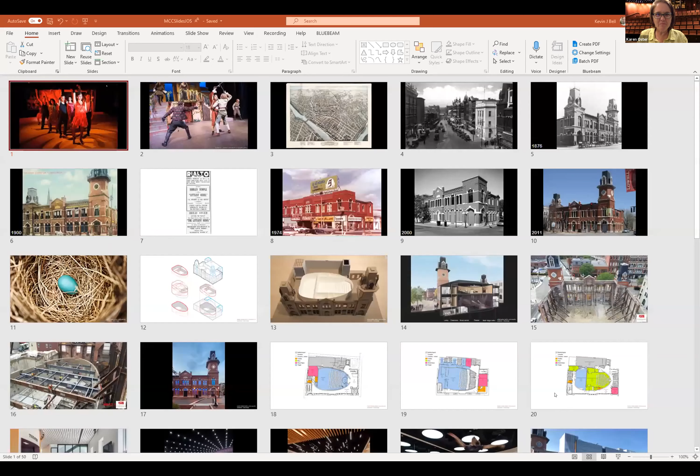Great. I think I'm beginning here. So my name's Karen Oster. That's not me. I am the chair of performing arts at Middlesex Community College. And just wanted to give you a little bit of background about Middlesex. We have 2 campuses, one in Bedford and one in Lowell. Our Lowell campus we acquired in 1987, so it's been there for quite a while. It's one of the largest community colleges in Massachusetts. We have about 80+ degree programs and serve about 12,000 students.

Middlesex is also a leader in global education and has had a huge impact on the area in terms of economy and has contributed significantly to the community. MCC also has a history of securing historic buildings with the John Nesmith House, the Federal Building, and the Middlesex Meeting House in Bedford. So this is not something that we haven't done before, but this certainly is, I think, the best out of all of them.

So what you're seeing here is our old theater. And it's interesting because you can see from this lovely actress Joan in the front that the top of her hand, it's not an optical illusion, but the top of her hand is actually very close to the ceiling.

One of the things in first sort of talking about the performing arts program is that we never really had our own space. The performing arts program at Middlesex has a theater department with two degrees and a music department with two degrees, but the music department always had a recital hall in Bedford. So the theater was always kind of this nomad looking for a space.

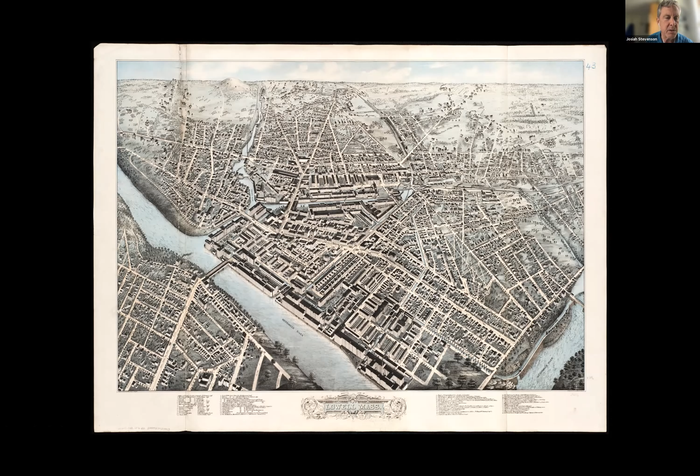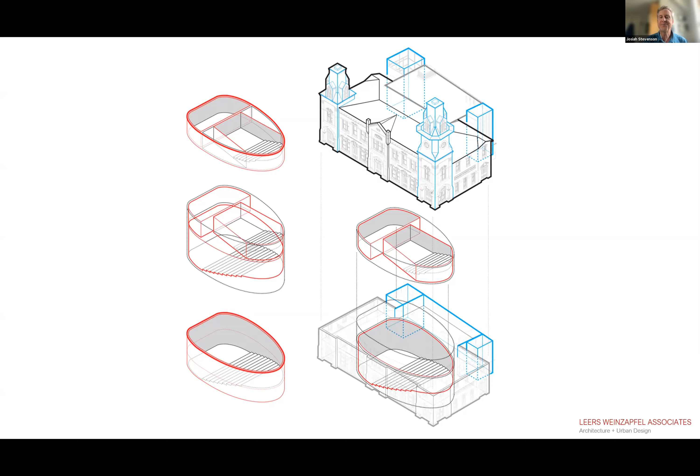And then also you see the original structure, and there's a back piece. So in the end, there were four towers. There was the entry tower, there was the stair tower. In the back, this new element was a cooling tower and an elevator tower. So there you see the idea in model form. Next slide, please.

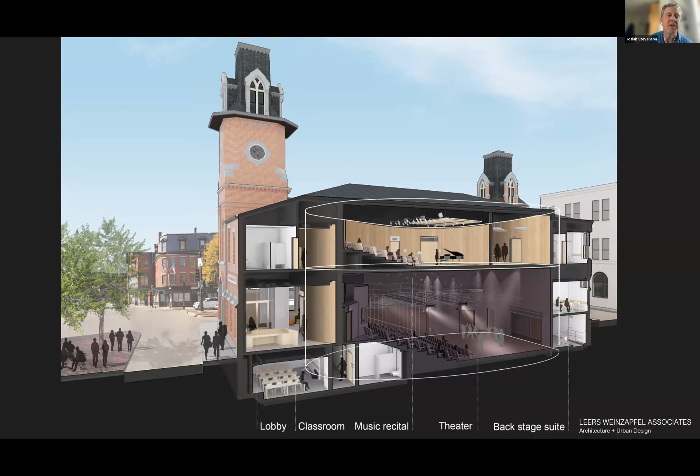And then this, I'm not going to spend time on the actual drawings, but you can see the entry area on the left on the first floor, and then you can get into the back of the theater, and it's all fully accessible, and you can take the elevator down and get into the front of the theater in the basement, and that's fully accessible as well. Next.

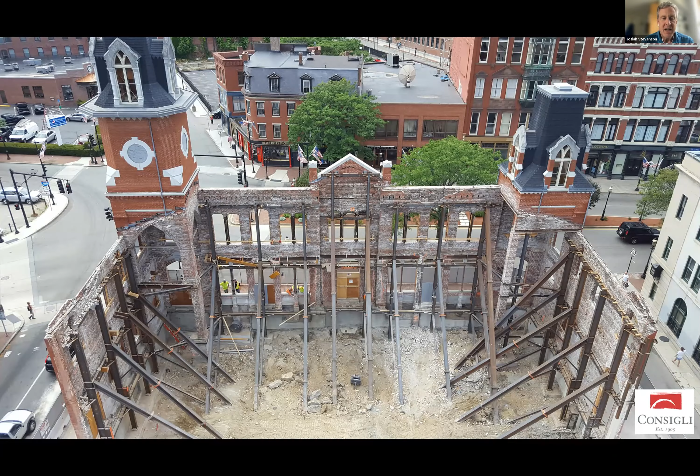Next slide, please. So this egg became this massive structure. It was the horizontal resistance. It took all the loads basically. And it's basically a 10-inch concrete block, fully grouted structure that held on to the existing outside structure.

And on the subject of renovations and embodied carbon, which is an important issue here, obviously building reuse is the best thing to do for that. And then next on the list would be wood or mass timber. And then it gets worse and worse, steel, and then concrete. So here what we're doing is adding massive amounts of concrete to this building.

And it reminded me of a guy I used to work with. He used to come in the morning with a healthy drink and a Danish filled with sugar. And I said, you can't put those two together because one is bad for you, the other one is good. And he said, well, bad and good means even. I'm even. So at first I thought, if we're adding all this concrete, it's pretty even.

But the truth is, if you're building a theater, you're building something that resists sound transmission from the outside, and this is in the city. So I think it's still in the net positive range. Next.

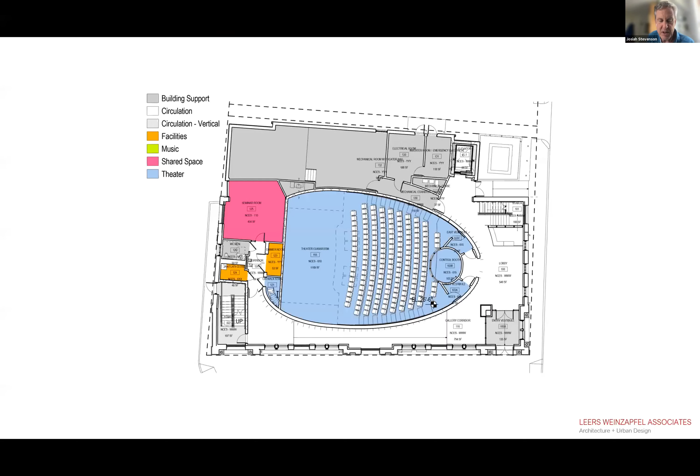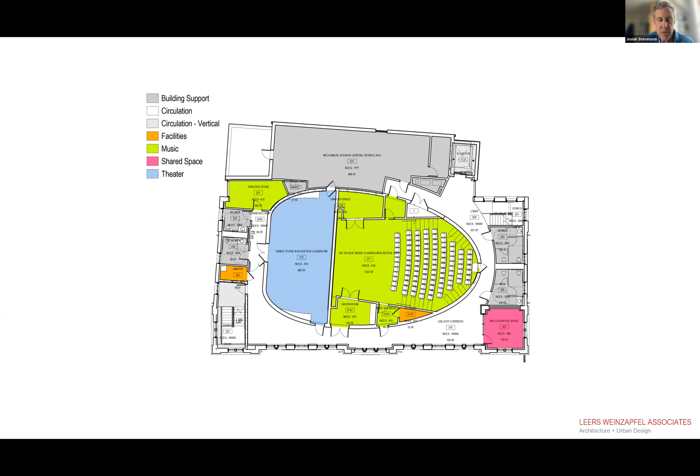And then I'm not going to go through the plans because we don't have much time. It's not really worth discussing, but there's the first floor. You come into the theater from the back and descend. Next. And this is the basement where you can get around to the accessibility on the lower level. It's a very steep rake, dropping one floor. Next. And this is the performance space and the dance studio in blue.

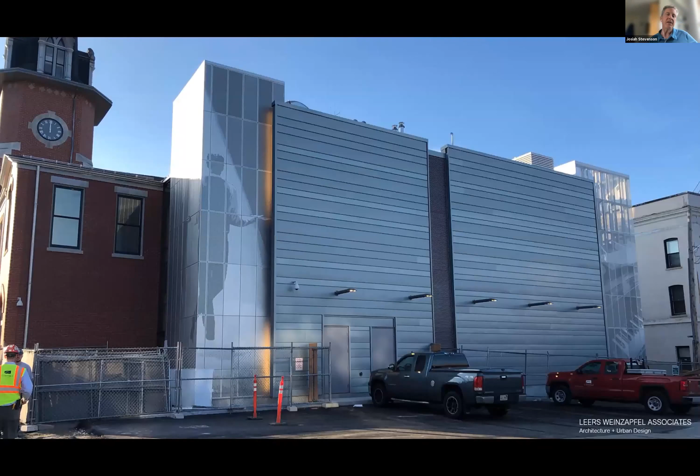And then finally, on the rear of the building, we added a couple of feet of mechanical spaces. And in Lowell, if you look around, some of these historic buildings have these little appendages in the back, and they're often aluminum or steel, like elevators and things like that. So this is in that spirit. And at the elevator tower is a Chicago image that's taken from Richard Gere's, not Richard Gere. And on the other side is the musical part, which is the piano. And Kevin will talk in much more detail about this now.

Thanks, Josiah. Just going to touch on two things. Josiah alluded to that shoring challenge with the existing historic envelope, and then a little bit on sustainability. So it's a little bit about how you get from design to here. This is an image of the building when it opened.

Gosh, the pandemic has my time off. So it was like 2 years ago, 2.5 years ago. I can't remember anymore. Something, pandemic plus a year maybe.

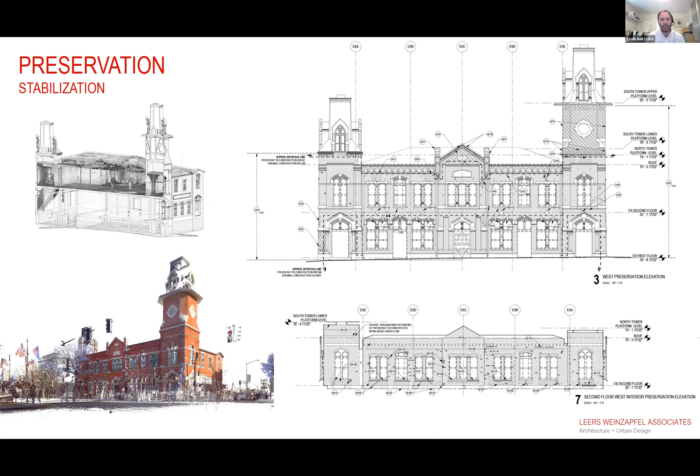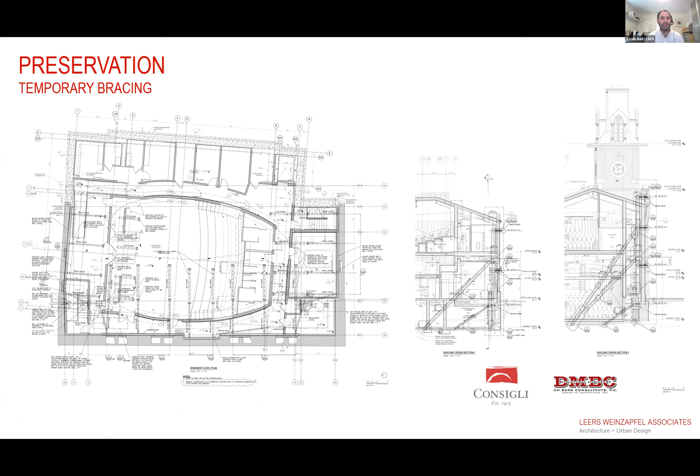From there, Consigli was our CM, and they worked with DM Berg to develop that temporary bracing system. And I think what's most important about this is what it means to brace the exterior during construction and what that affects. Obviously this temp bracing is coordinated with the existing structure. It needs to be coordinated with the new permanent structure. It needs to be coordinated with all the underslab utilities, any major duct and pipe routing,

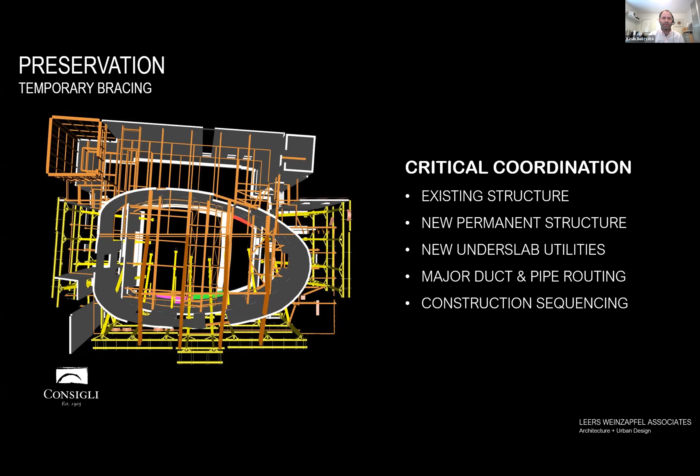as well as simply the construction sequencing, because the temp shoring, you're seeing these really long kickers running from basically bedrock up to the roof of the building, but all of those have to go in when the existing structure is there and come out when the new structure is there. So it's thinking about just about every system in the building, and this temp bracing system has to avoid it and be able to go in and out without being the worst challenge in the world, which it was substantial.

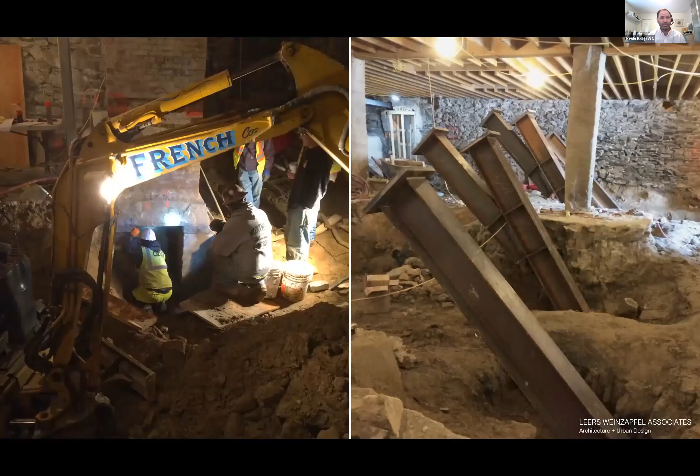So just a few images to walk through. The image Josiah showed is pretty incredible, and this kind of tells the story of how we get to that. The image on the left here is actually one of the underpinning subs. He's actually tucking his head under a corner of the 500,000 pound tower. I think that's the final section of underpinning that had to go in. So we had to underpin portions of the building before we could begin to brace it, and had to actually reconstruct huge portions of the interior of the building so it was structurally sound to brace. And then they came in.

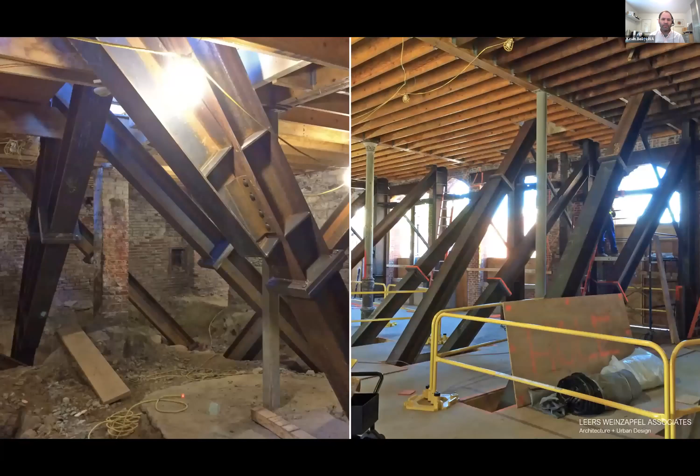The temp shoring in our case was close to bedrock, so that's good. So these kickers are actually anchored to the bedrock with 12-foot long rock anchors to keep them in place throughout construction. And then you can see in these images those pieces of those kickers getting assembled in the existing building, slowly making their way up to the roof, which then allows demo and recycling of that existing structure.

And really there were two big reasons why the existing structure just wasn't adequate. One, it was wood, and it wouldn't support assembly loading. We have assembly loading at all 3 floors here. And the second piece is the roof had pretty much failed, and so that was going to need to be replaced. So a huge part of this building needed to come down anyways.

And so we actually did a study during design to see what we could save, and came to the realization that we couldn't save much on the interior. And it was best programmatically, and for the facade, the important element that everyone was really committed to and attached to preserving, to do this new structure on the inside. And on the right here, you see that kind of mangrove roots coming off the existing building down to bedrock.

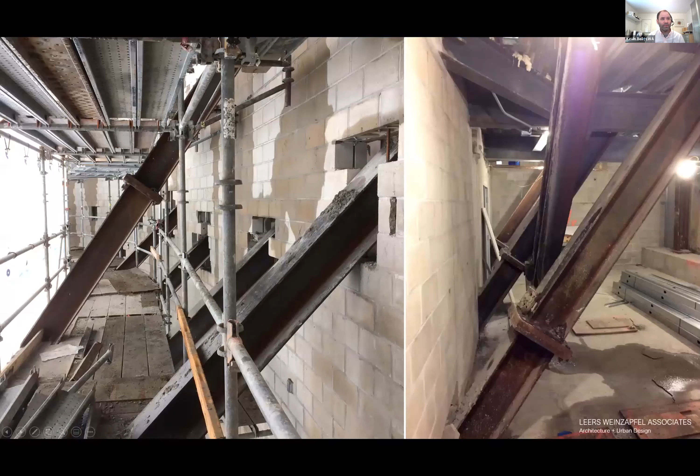And then just a few images of building up around that temp shoring, including a zero lot line, single-sided concrete wall on the one side that is new, and a lot of concrete going in to deal with that. On the left here, we're in the theater. This is all the temp shoring coming through.

To be quite frank, we could not have done this wall out of cast-in-place concrete. It could really only be done out of CMU, just because I think we had 46 holes in that wall for the temp steel, and another 60 or so for permanent steel.

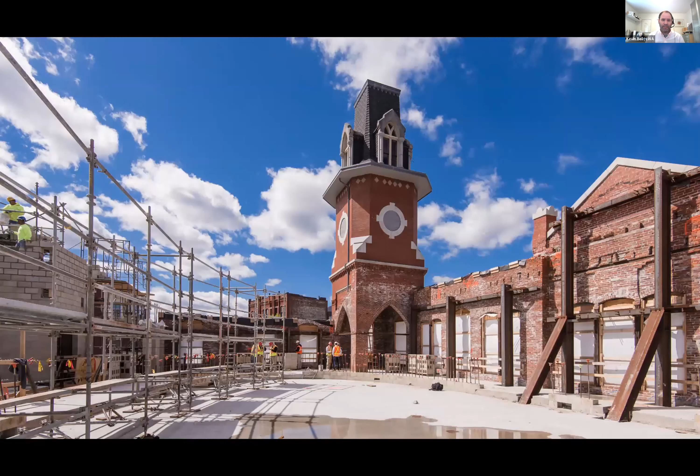So to have a mason, a craftsman on site that could actually work with the engineer, work with the CM, and work with the design team to figure out how to build this wall around, not just at the theater, but elsewhere around all this temp shoring, was an amazing task. And the folks that did it were really fabulous, bringing that up to a second floor level and ultimately to the roof.

And this is another point, to Josiah's point: in order to get this steel out, it had to be cut into small pieces and taken out by hand once the permanent structure was in place. So steel is highly recyclable. That's the piece we kind of hang our hat on when it comes to this, but there was actually more temporary steel in this building than permanent steel.

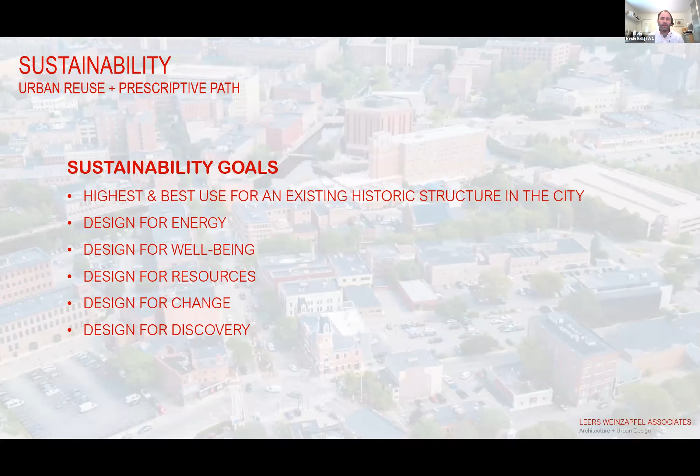And so that brings us to sustainability around this. We're doing a lot to an existing building. And the first point to make is what both Karen and Josiah alluded to: what's the highest and best use for a historic building in this context? A point that was important to us, and I think conveyed to everyone, is that this building really had a lot of lives, and we know, the college being a good steward of buildings, that quite frankly, this building will be a theater for the college for longer than any other life it's had.

So having a user that can adopt a building and make it their home and take care of it means that we're going to have a building that's used and lasts for a very long time into the future. The other piece being, they're in the city. The college has made a commitment to open this urban campus, to acquire buildings and restore them, and to be a really active and vital piece of the city. And this building helps them expand that.

So in that sense, there really wasn't anyone else who could save this building. It was really the college, and proof of that is that it took 30 years to get it saved. So I think that's an important piece of sustainability when it comes to historic construction: really making sure that you have that highest and best use for it, so that it really does last into the future.

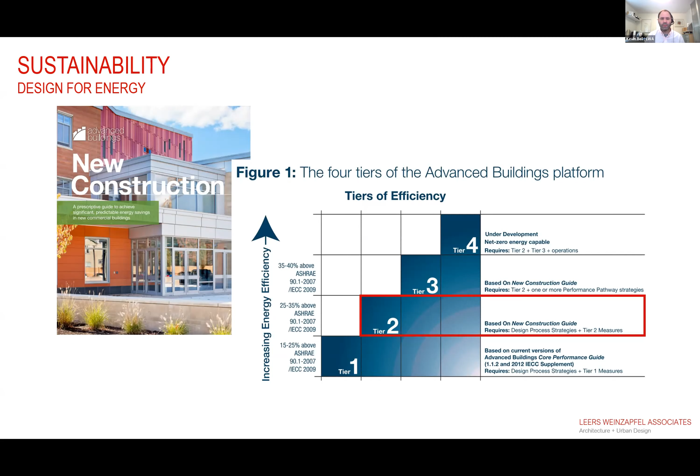So we treated the building to the extent we could as a new building, and really limited where we couldn't meet these measures at the tier 2 level just to the existing building, where really durability was the major component. So broadly speaking, we brought the envelope efficiency way up, and quite frankly, even the existing historic masonry walls, we were able to get them very near to at least code compliant insulation levels, while still keeping them breathable and allowing that moisture to both move into the space and out to the exterior, so that basically that exterior wall that's been able to breathe for 140 years could continue to breathe.

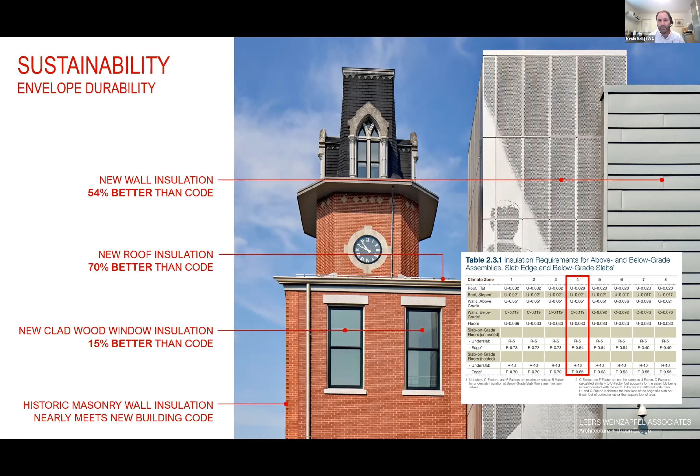We're on an urban campus in a city, and there's no central plant, so we don't get the benefits that a lot of academic buildings, particularly on campuses in the Northeast, have, which is campus utilities like chilled water and hot water. So our building, and the reason we needed so much mechanical space here, is because we have a plant in the building. We have a chiller, we have boilers.

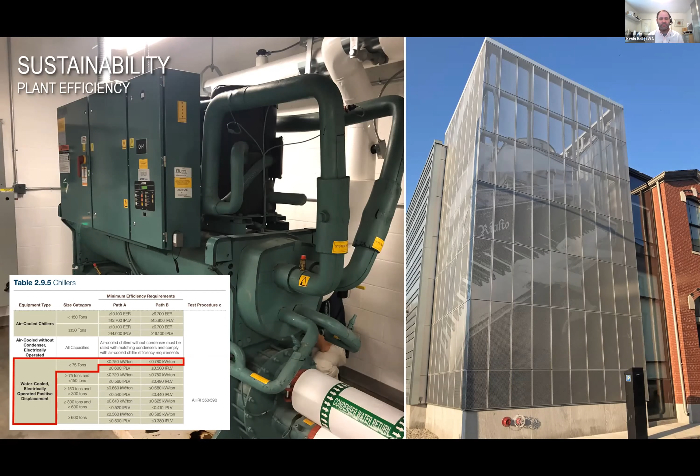And so the prescriptive system that the new construction guide applies really gives you kind of guide rails to work within and meet measures. And it can be really beneficial overall, because there aren't necessarily gray areas. If you meet these prescriptive measures, you have a good chance of being energy efficient. So it's great when there's so much more to deal with in an existing historic building that might take precedence and priority over other things.

Important to us, and actually a really great benefit of the existing building, part of the reason why it requires so much bracing, is the number of windows in it. It's a really porous facade as far as windows go, and so we tried to organize the public spaces and the spaces that could be daylit around the exterior, and quite frankly, we have some spaces that are restrooms that are actually beautifully daylit, even with translucent glass, because we wanted to bring light in as much as possible and maintain that transparency to the outside that the original building had.

And by that same method, thinking about well-being, making sure that these theater spaces, theater, recital hall, dance space, could operate at the same time as teaching spaces. We're so packed in that the recital hall sits over the theater. And so there's this fairly complex floor system between the two that isolates it, so Karen and Carmen and others can teach in the space.

And then that egg form, if you will, that CMU really helps isolate the interior from the exterior. So even though we're in a busy city and there's frequent traffic going by on three sides, once you move into the theater through the vestibules and into the recital hall, it's really quiet and calm.

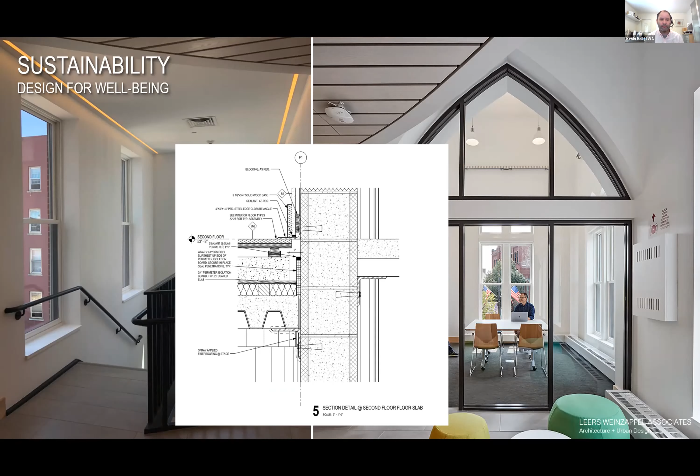We didn't pursue LEED on this project because we used that alternative method, but we did want to make sure that those criteria that we attribute to LEED frequently, we still incorporated those. So although we weren't seeking LEED certification here, we did require certified wood and low emitting materials, and obviously construction demolition waste tracking and diversion, as well as maintaining all the construction indoor air quality requirements so that it's a safe, healthy place to be in the end.

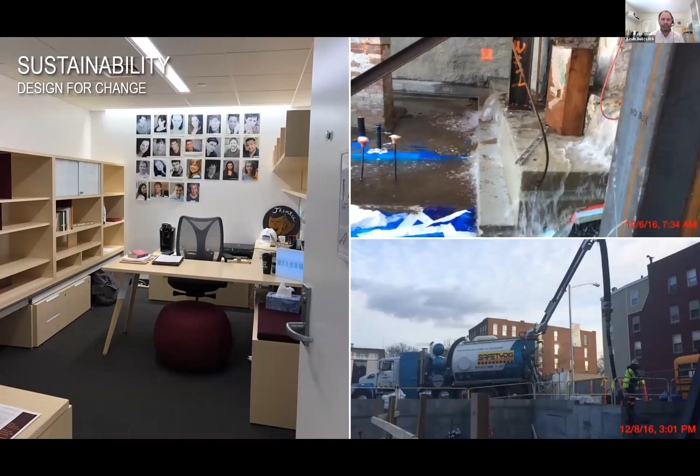And that continues. This is actually Karen's office. Sorry, Karen, I'm showing it.

Resilience in this context is both resilience against, on the right here, you're seeing we had a water main break during construction, and the pipe in Lowell is so old that oftentimes it's been leaking for a long time and carving out basically underground caverns that connect the buildings. So this was a water main leak that brought 3 feet of water into the building during construction.

So part of our design and part of making this building as viable as possible was to get program into the basement, and that meant a waterproofing program, under slab drainage that worked with, in fact, an under slab depressurization system. We're right on granite here, and knowing that for Karen and her students, the kids in this building, it is a second home for them, we wanted to make sure that we were eliminating any potential for someone who's in this building for a long time to have any exposure to radon.

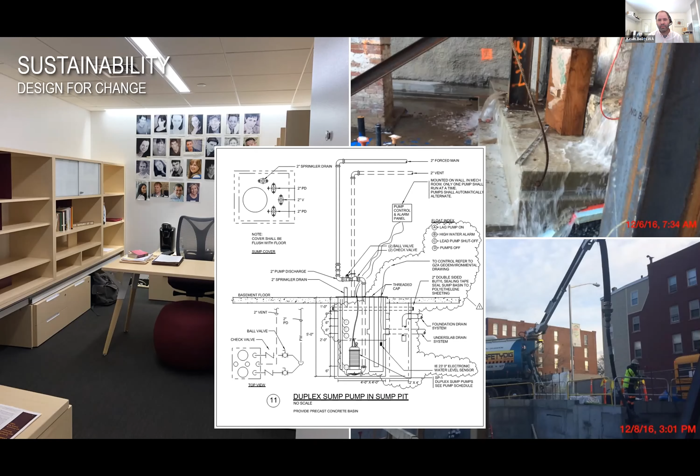So we have an entire depressurization system under the building as well. And there's other measures too to make sure we don't get backwater from the sewer system, which is combined, and that the whole space stays dry and safe for teaching.

And then finally, on designing for change, although Karen and her team use these spaces quite frequently, it was important to the college that they be able to use it as lecture space, as meeting space, as seminar space. And so even in our recital hall, which was meant to be very quiet and devoid of technology, we tucked some things away so that those spaces could be used by the rest of the college, so that it was always flexible enough to accommodate different uses, even though these are highly technical and specific spaces.

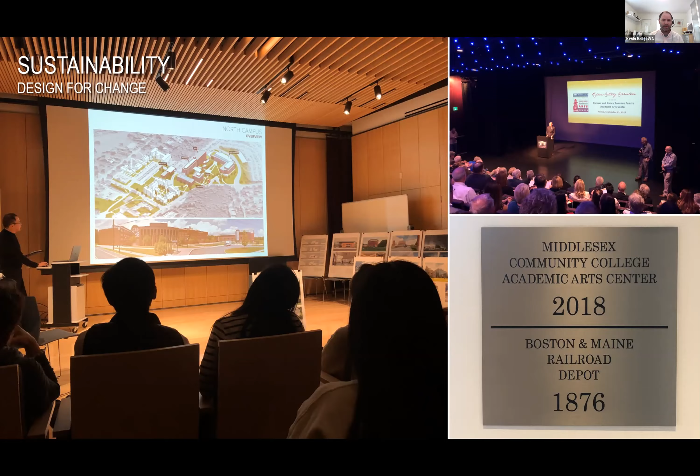They can use it for their performances, but also just use it as a way to teach, maybe even an introduction to building systems and building controls. So aside from simply the craft of theater in the space and using catwalks and sets and all that, there are ways for students to really interact with the building on multiple levels.

All right, thanks. Let me share my screen here. Yep. All right, is that showing up as full screen for everyone? All right, so

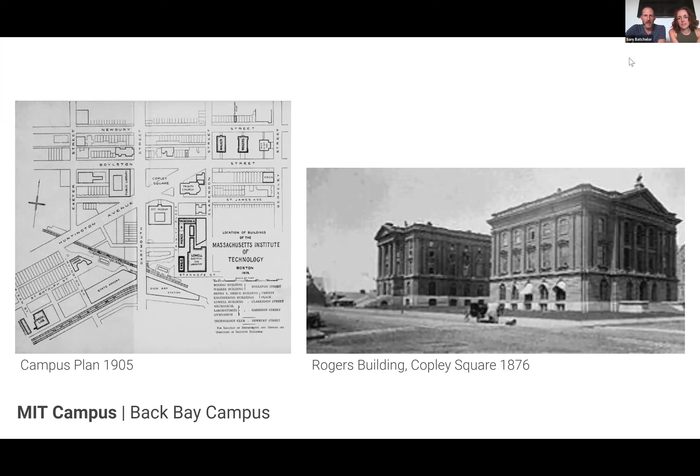MIT was originally on the Boston side of the river. And then when the Back Bay was filled in and developed, there was an opportunity for MIT to get a lot of land on the Cambridge side. So that precipitated their move to Cambridge. The original structures for MIT on the Cambridge side are the classic dome and courtyard, which remain to this day. But of course, MIT is now a much larger campus entity that has grown to over 168 acres and 12.5 million square feet.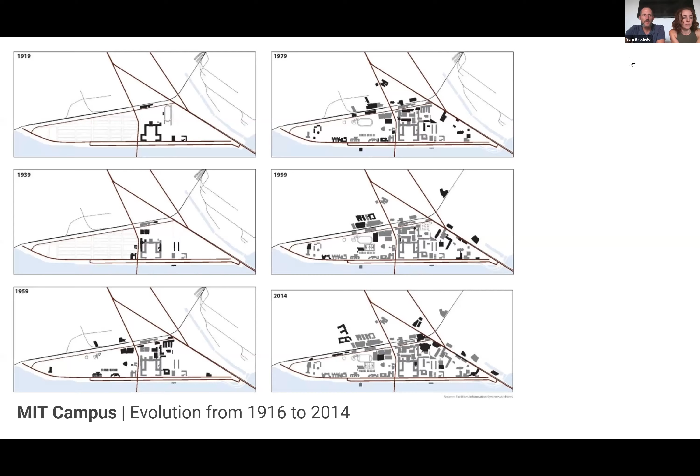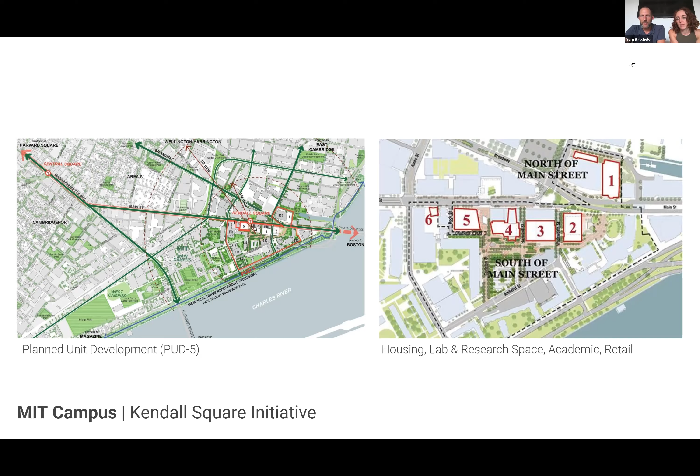So our project for the Theater Arts Department grew out of some enabling work for a new life sciences project in Kendall. Their original building, the Rinaldi tile factory, was right in Kendall. And so as this nondescript former tile factory / automotive garage, it was prime real estate for life sciences. So they got bumped, and on the plus side, they got a new home out of it.

So a little bit of background on the program itself and kind of what we were working with starting out on the project. The first thing was quite a bit of growing pains with the MIT Music and Theater Arts program. It had recently become a new bachelor's program of science in theatrical arts, and there was quite a bit of increase that was associated with that.

What was formerly kind of a creative outlet for engineering students was now something that had a bachelor's degree in its own right. And as Sam said, it did operate for years here in the heart of Kendall Square in the Rinaldi tile factory. And so this space was really used, every inch inside this building, for a whole host of theatrical purposes. So, spaces were overutilized. There were a lot of really non-ideal conditions. Their spaces were undersized and used for 5 things at a time.

And what was interesting is while the space was dysfunctional, it also led to this continuous kind of collaboration, prototyping, feedback, integration of all the program that really became kind of core and signature to their program and how they wanted to design. So within just this small space of the Rinaldi tile factory, they had drawing classes, design classes, lighting, set design, costume. They had performances with this big cube that they just kind of outfit and made a quasi set in the middle of their scene shop. So it was very hands-on and behind the scenes.

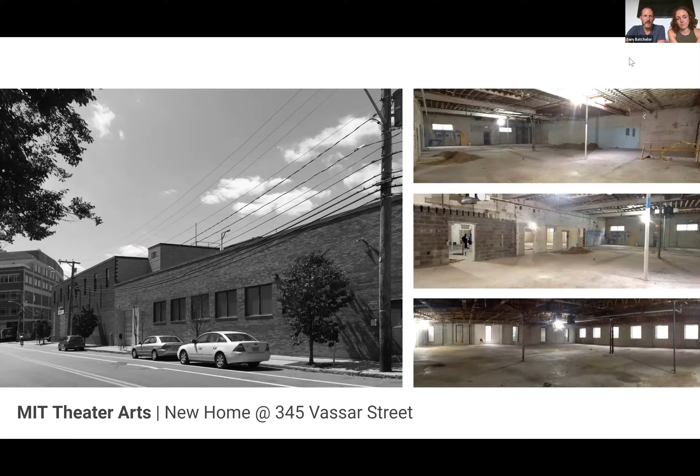And so in addition to hosting all of these functions that were in the Rinaldi building and were being consolidated from other buildings, the biggest opportunity programmatically was to actually integrate a proper performance space into the department space, as well as to create some real identity and presence for them on campus, in particular here on Vassar Street. So the question of identity was a big one because, like Sam said, this was a completely anonymous, underwhelming structure and not the most prime location.

So they really wanted something that really reflected the character and quality of the program that they developed over time. And they actually quite liked the grit that came with the historic structure. It was reminiscent of the Rinaldi tile factory. So we were really trying to look at ways to make this project feel and seem like them. But one of the interesting asides is that, because we work on buildings of lots of different levels of preciousness, it's like, what is the value inherent in the structure?

And I think similarly to the one Leers tackled, this was a 0 lot line building and we could fit the amount of square footage we needed for the program. Beyond that, there wasn't a whole lot that this existing structure was giving us. So it was giving us the zoning opportunity to achieve what we wanted and to save some of the existing carbon, but it wasn't that the structure itself lent to theater art. So from an intervention perspective, we had this two-part building and we inserted this double height addition that was the performance space and lobby.

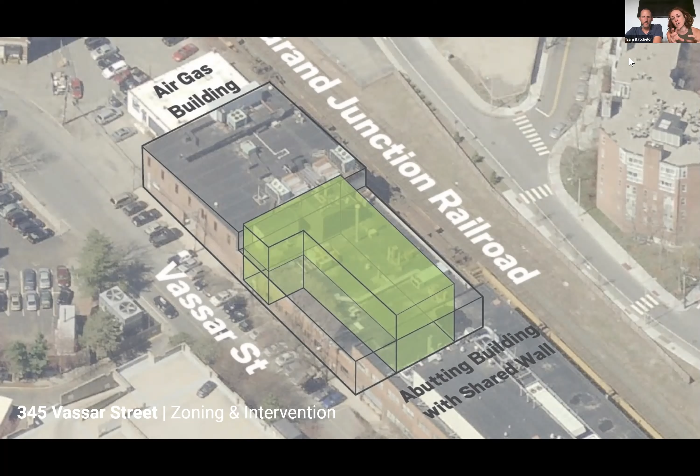And in the planning of it, the idea was that we were really going to make sure that all the spaces, both front and back of house, were part of the experience. So all the adjacencies, spaces spilled to one another. They all opened into these communal mixing spaces. It was really important that both the making and the performing were one and the same.

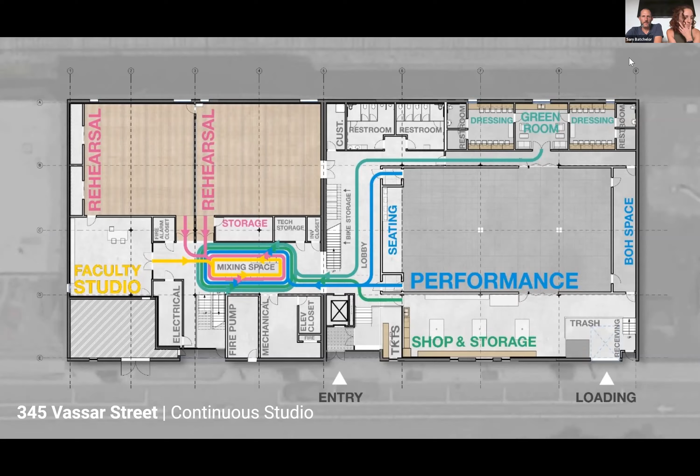And so as visual inspiration, it was interesting. Very early on, we were looking at ways of overcladding and screening. And from the theater department's perspective, screens are very much about the tech and the sciences and the lab buildings. And they were like, we have a different character on campus. And so there was a lot of teasing out what that is. So these are two pieces of art that came out of this conversation with the theater folks, looking at Louise Nevelson and this Lawrence Weiner installation, that really shaped the architecture itself.

So, you know, we were looking at ways to make all of these unique pieces and things that happened feel integrated as a whole. And so that really led to some of the ideas behind the facade intervention, where we basically, as a concept, closed in all the masonry walls and set back the brick so that you could read that history as part of it.

We painted it all black as just kind of creating a shell. And then we cut in openings where we needed to either access the building or reveal something inside or really showcase things that are happening. And it was important to us that we weren't just showing the performance itself, but that we're showing where they're building, where they're designing, where they're loading and unloading, and that's all what animates the street edge.

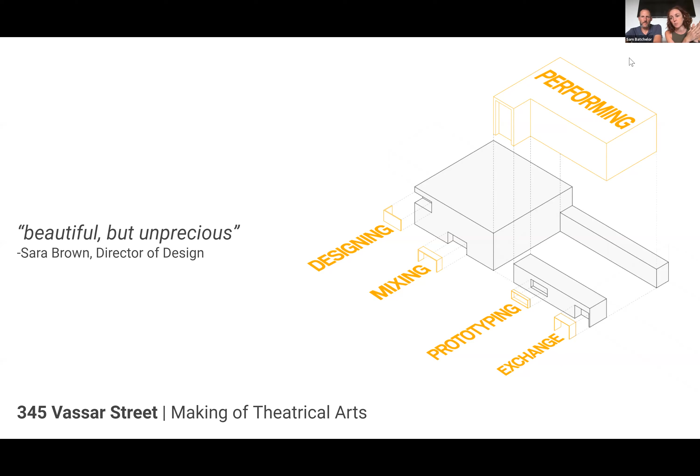And I think one of the descriptors that Sara Brown, the director of design, gave us early on is that they wanted a building that was beautiful but unprecious. Which we thought was just a really wonderful way to think about architecture. So the material palette was very, we had a few materials that we leveraged to their greatest extent. We were looking at ways to highlight remnants of the building and save the grit.

We did fully insulate it, so a lot of the grit and floors were no longer in their historic state, but we found ways to leverage other pieces of it and make sure that you could enable the arts in all spaces. So this was that demising wall between the two structures that didn't need to be insulated. So that became a feature wall in the backdrop of our primary stair. And then all the stairs and railings throughout were made of Schedule 40 pipe, so they could rig and install throughout the building as flexibly as possible.

And what has been just really wonderful is to see how they've really gravitated toward it. This was their opening brochure, opening night, and we were just really excited. I think Karen said something earlier, like, I'm the recipient of this building. For us, the idea that the end user really owns it and loves it is really amazing. So we were really thrilled to see them take this and turn it into its own identity.

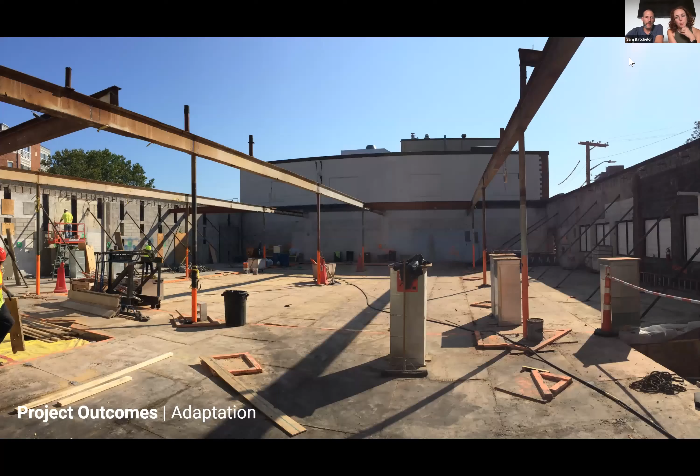In terms of specific project outcomes and lessons learned from almost 2 years of occupancy at this point. First, from an adaptation and sustainability standpoint, as Kelly mentioned, on the one-story portion of the building where we inserted the theater, similar to the other project, there wasn't a lot of ability to save much beyond the exterior walls. We originally inserted the theater in the center 2 bays of the 4-bay structure, but by the time we tried to shore up the outer 2 bays and drop this structure in, it really just made more sense to replace the roof level at this 1 story.

The 2-story portion remained completely structurally intact, which did present some ceiling height challenges for some of the rehearsal spaces, but ultimately, the cost and sustainable benefits from keeping those structures were worth it, and we were able to make those work. So it was a 2-sided approach to that.

Similarly, these new spaces now were able to completely serve the various functions of the program, not just performance, as Kelly mentioned. So this is the main scene shop, which is adjacent to the theater and the lobby. So you have direct access to this right off the lobby, and you have views into that scene shop from the street. So again, in keeping with the spirit of how they operated at Rinaldi, the process is as front and center as the performance.

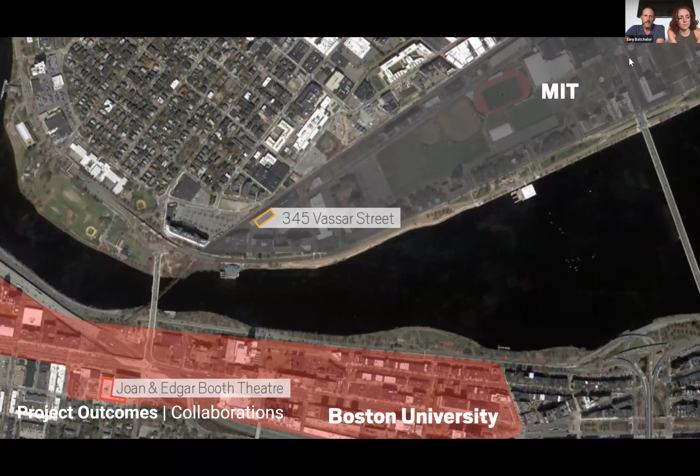From a community engagement standpoint, it's a pretty interesting location because even though it is on the kind of campus side of things, there is this train track that runs through Cambridge right here with limited crossing points. And we've got 3 of them called out here. And so that does kind of isolate the residential neighborhood from the MIT campus. But it's starting to become more permeable.

Sidney Street here is kind of one of the main research corridors for MIT. But, Flour Bakery, I live right near here, so it's pretty interesting to sort of see this evolve, but it's starting to get people onto the MIT side, and it's become a blurring of lines, even though there's a pretty hard boundary with that railroad track.

And it is sort of an oddly industrial kind of section of Cambridge. And so it is nice to have it start to be enlivened with activity and students and performances for the public and things like that. So it's become a really nice placemaking piece for that corner of Cambridge as well.

And just the last few things that have been outcomes of this: with historic buildings, oftentimes you end up with kind of nooks and crannies of spaces that you're trying to figure out what to do with. They predate the project. And so in this one, it was interesting because we actually made, in these little nooks and crannies, some mixing spaces, some sitting, kind of just off the beaten track.

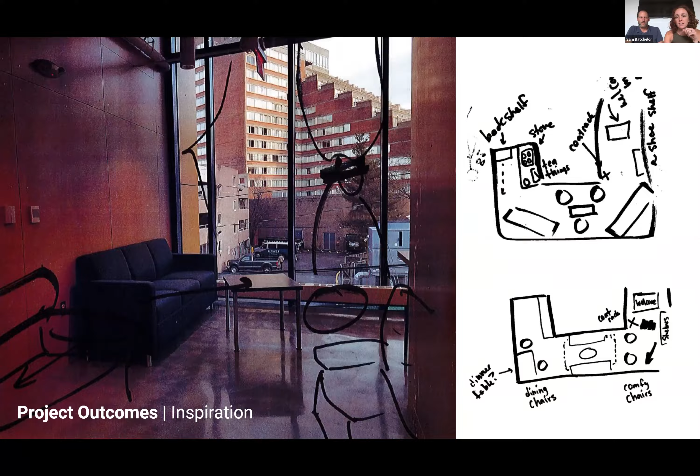And it's interesting because it's also become a source of inspiration in a way that we hadn't anticipated. They use it to think about scale, to think about set design, how people can enter and move through a space. So these are sketches by students that they've done as part of their set and design studios, where they're really looking at the various spaces throughout the building to test out things in real time.

And in the next couple, it's spaces that we hadn't even considered high priority design spaces. The dressing rooms and green rooms have similarly become part of that design process. More.

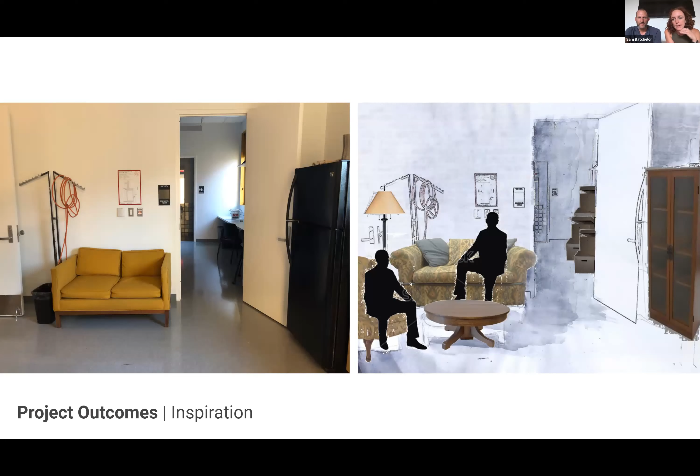And just seeing how all of that then feeds back into the primary performance space, and how it's really interactive, and it has this blurring of audience and performers and projection and set design, all of that comes together as one, has been really amazing.